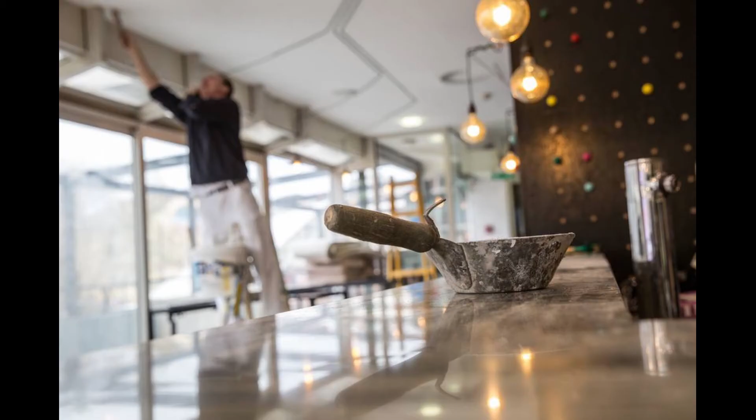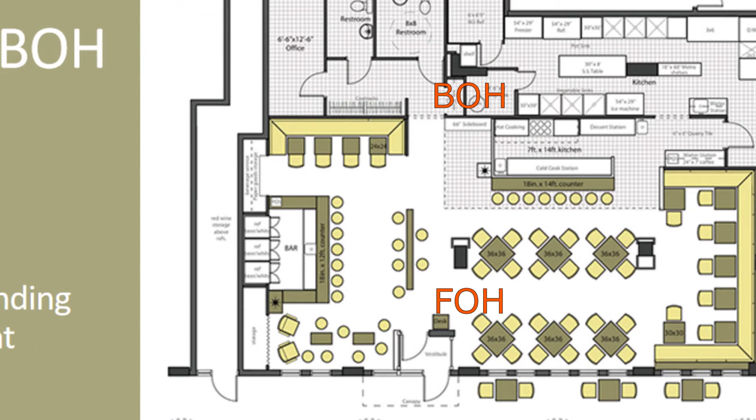Let us first understand a typical layout of a restaurant. All restaurants are divided into two typical zones, FOH and BOH. FOH stands for front of house and BOH stands for back of house. In this typical layout, the color shaded area is the FOH area. FOH is that area which is typically visible and accessible to a customer, such as reception area, different types of seating, cash counter area, even the bar counter, washrooms for the customers, etc.

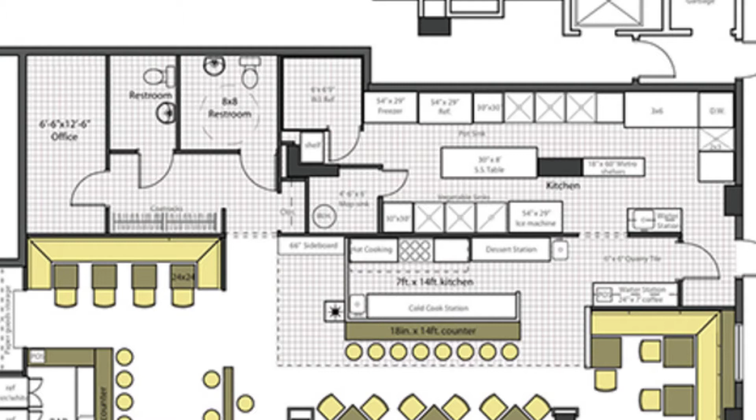BOH is not accessible to a customer and is the heart of a restaurant. It is where all the action takes place. In this typical layout, the grey shaded area is the BOH area. It typically includes the kitchen area, the cold storage area, the manager cabin, the staff change rooms and washrooms.

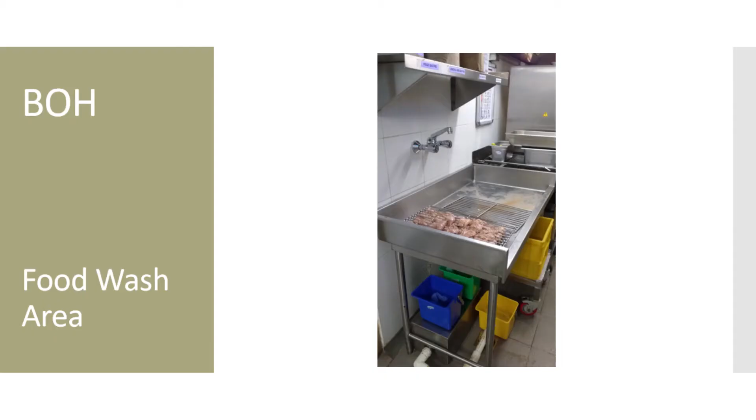The biggest and most complex part of a restaurant is the kitchen, as this is further subdivided into different components, which includes the food wash area, cooking area with options of stove and oven cooking, a clean dish table, sink areas for hand wash and dishes, a dishwasher area, food prep area, walk-in cold storage, etc.

The first step to start with the execution works is to submit the complete drawing set to mall management for approval. If the restaurant is standalone, then this step would not be required, as in that case you would be submitting the drawing set to the Department of Fire and other government bodies for their review and approval.

Once you get approval on the drawings, you are ready to start the site and mobilize your workforce. The next step is installation of temporary lights, power points and water connection, which will be required for your construction work. In an operational mall, you will be required to only work in the night time. So planning your workforce accordingly is important.

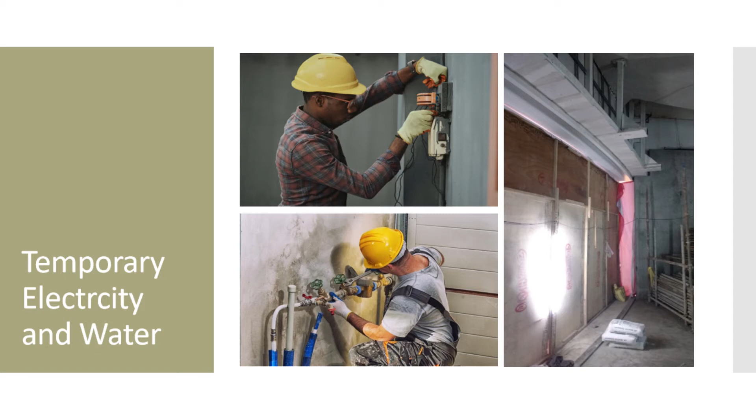Once done with installation of temporary electrical connections and plumbing connections at site, we will start with the site markings. Once done with the site markings, we will start with the framing for the partitions.

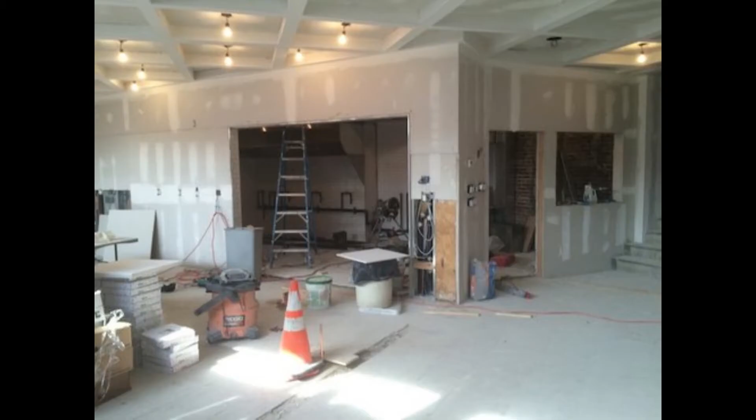Generally, a restaurant doesn't have many partitions. It's mostly the peripheral partitions and the partitions which separate the FOH and the BOH area. Depending on the requirements, you could either do a metal partition with GI studs or do a wooden framing. It totally depends on local material availability, though both kinds of partitions are equally good.

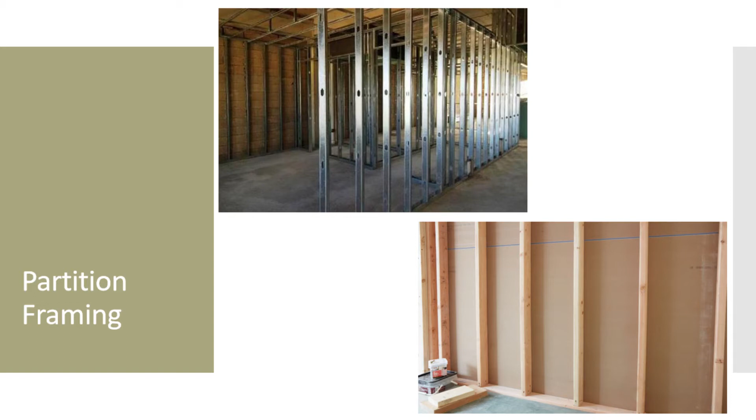From this point, I will divide the video into two major parts. The first part will be about the BOH area and the second part will be about the FOH area. This will help in understanding the concepts better, but please note that works in these areas happen simultaneously and not one after the other. The first thing to be done in the BOH area is marking of the services as per the layout.

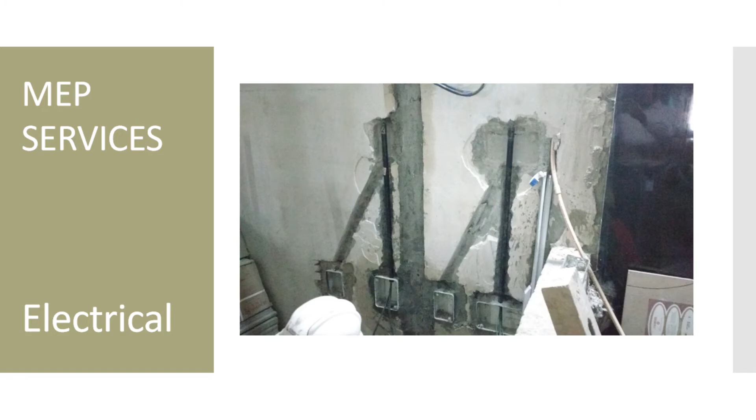The electrical points are marked as per the equipment locations. Wall chasing, if required, is done to run the conduits and install the electrical boxes. Similarly, conduits are installed in the ceiling for lights. This is followed by running wiring and cabling through the conduits, and finally installation of receptacles and lights.

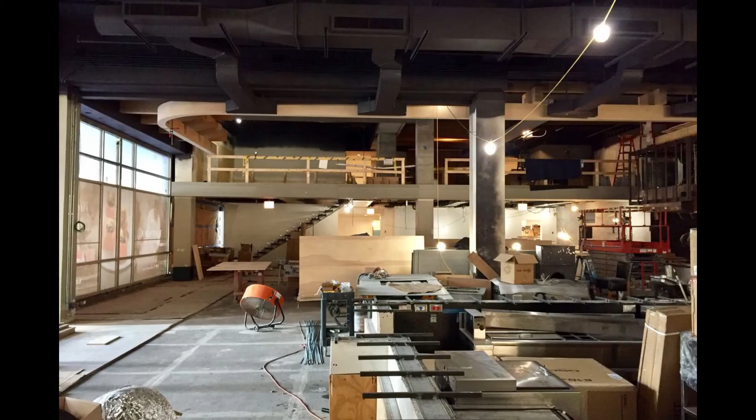The HVAC system is a key part in taking out the exhaust from the kitchen and also keeping the kitchen area cool. The point to keep in mind is the different type of ducts used for kitchen exhaust versus the return and supply duct for the cooling purpose.

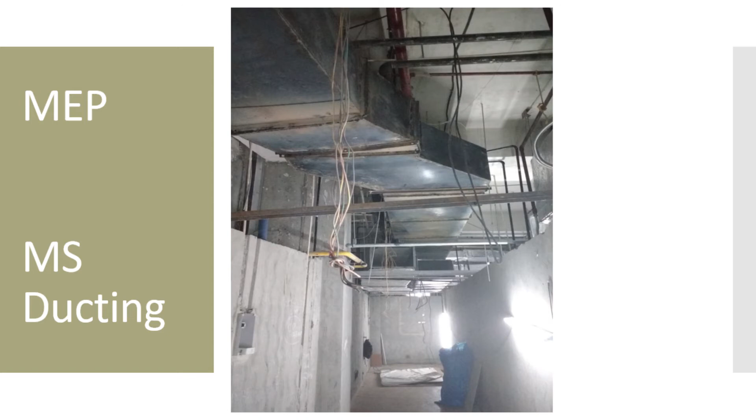MS ducts are used for kitchen exhaust and GI ducts are used as the regular HVAC ducts. The reason behind this is that MS ducts have greater fire resistance than GI ducts. Look-wise, the MS ducting will be greyish, dark greyish in color, while the GI ducting will be silver in color.

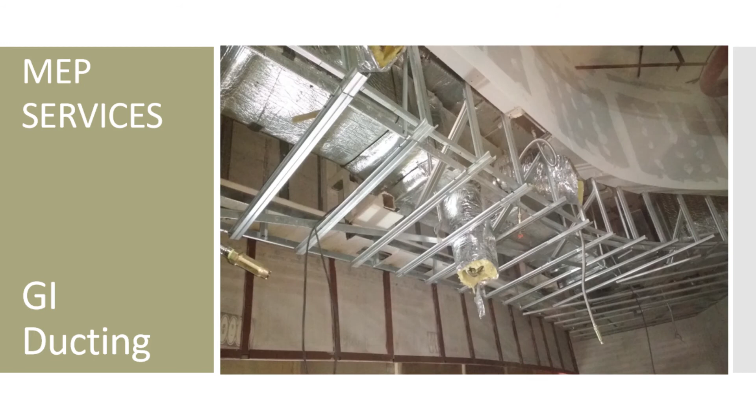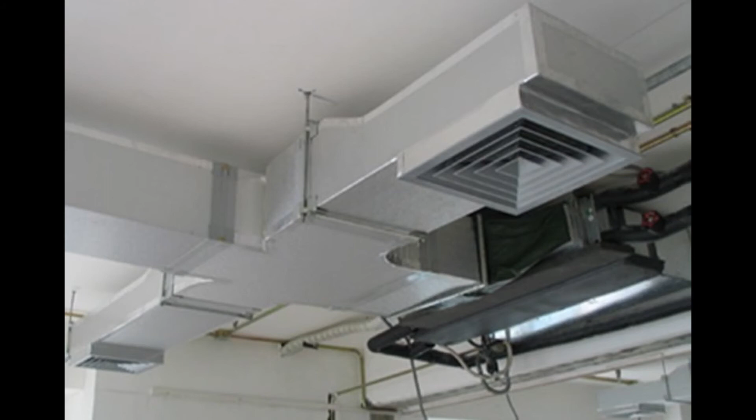HVAC ducting layout is first marked in the ceiling, then accordingly the supports are installed. Post that, ducts are hanged on the supports. Once the ducts are hanged, the different pieces of ducts are connected together and insulation is wrapped over them.

The firefighting system is very critical and consists of different components to prevent the restaurant from catching fire. These elements include the standard sprinkler system, which will work if the fire temperature bursts the glass bulb, and pressured water will be showered to douse the fire.

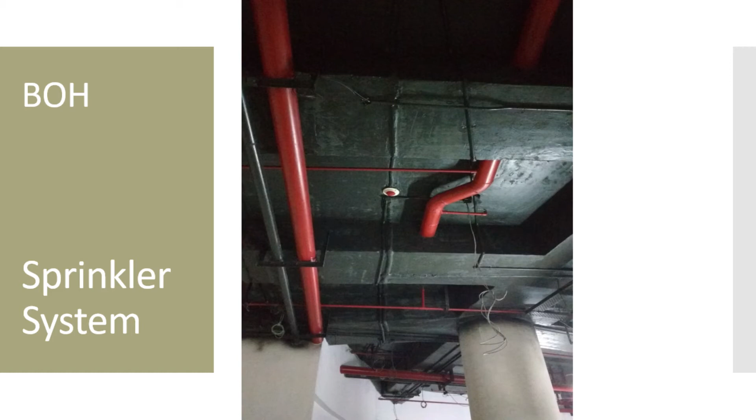The second component is the fire alarm system, which is triggered by heat and smoke. The BOH fire alarm system will be heat based and the FOH fire alarm system will be smoke based. Any heat or smoke triggers an alarm which will tell the occupants to vacate the premises. However, it will not douse the fire.

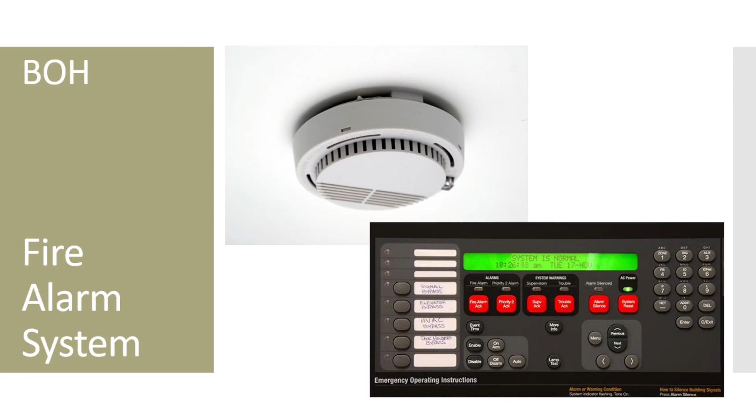The third component is the gas leak detection system. This is required in the cooking area, which triggers an alarm if the system detects any gas leak. This will allow shutting down any gas leak and prevent any mishap.

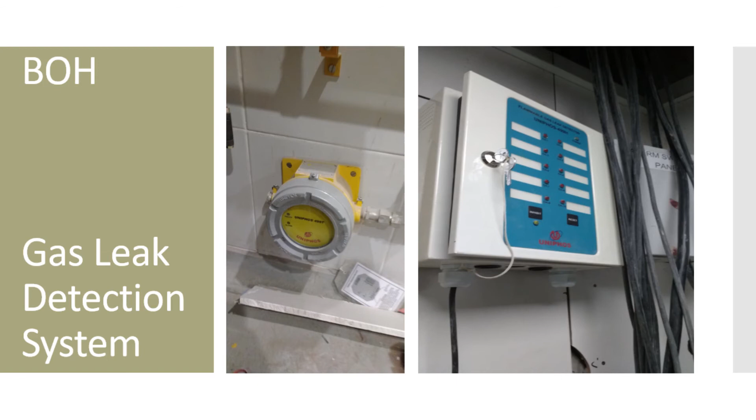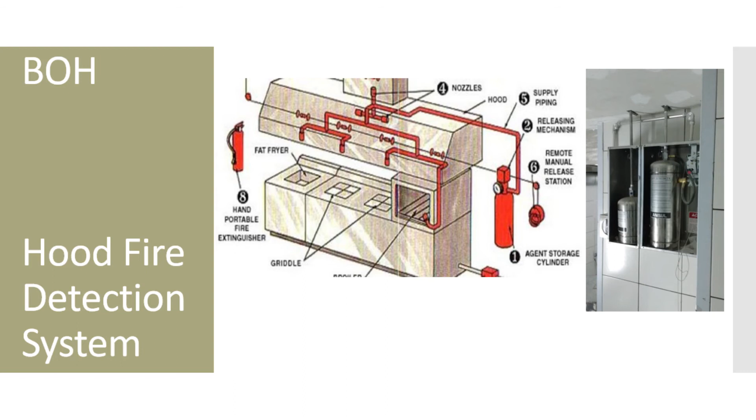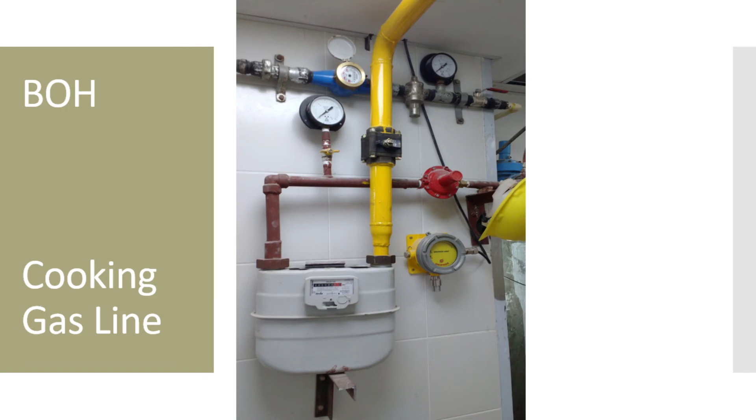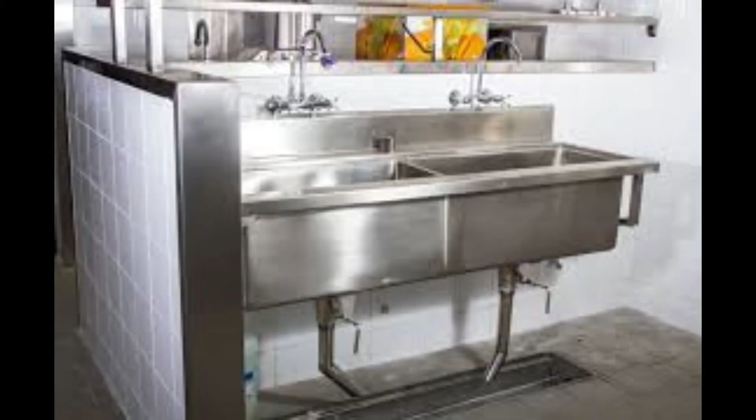The plumbing services are critical as there are several water supply and drain points in our kitchen, including points for hand wash sink, dishwash sink, dishwasher, drinking water supply, and of course the complete plumbing works for the washrooms.

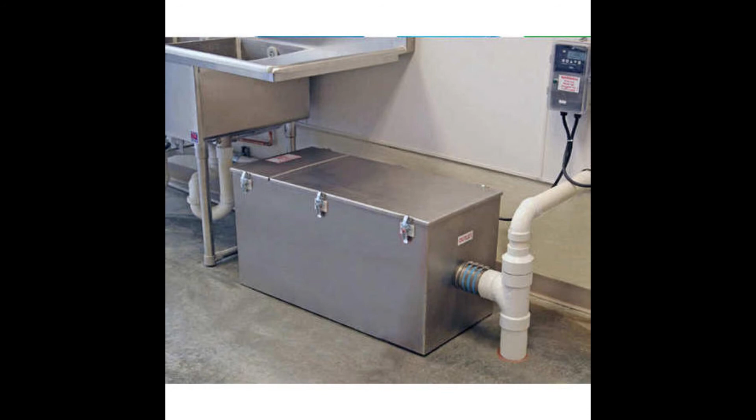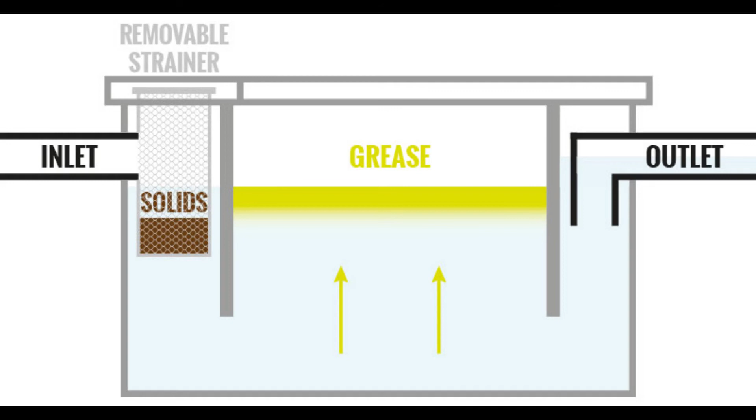An important thing to note is the requirement of a grease trap. The wastewater from the dishwash sinks does not directly go to the drain. Instead, it goes through a grease trap, which basically filters all the grease and prevents the drain line from choking from oil from the food.

Communication services will include having a phone connection and an internet connection, which of course everyone knows are indispensable for restaurant functioning, but are also required by customers.

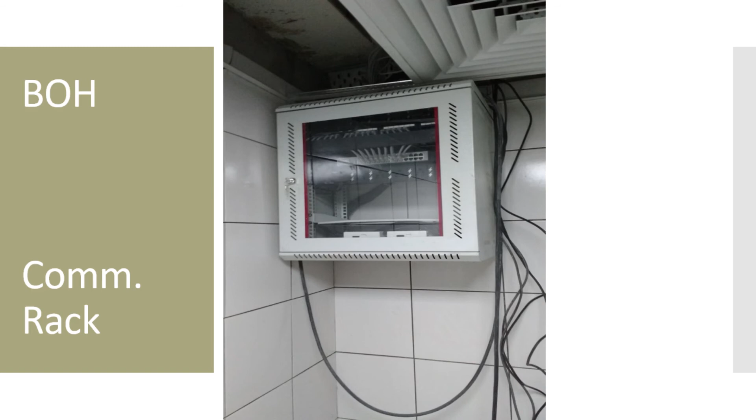A communication rack is installed in a designated space. Generally, this is installed at a secure location like the manager's cabin. This will house switches which will be connected to the server, and all the information such as inventory list, account details, cash flow, day-to-day communications can be securely backed up in the server.

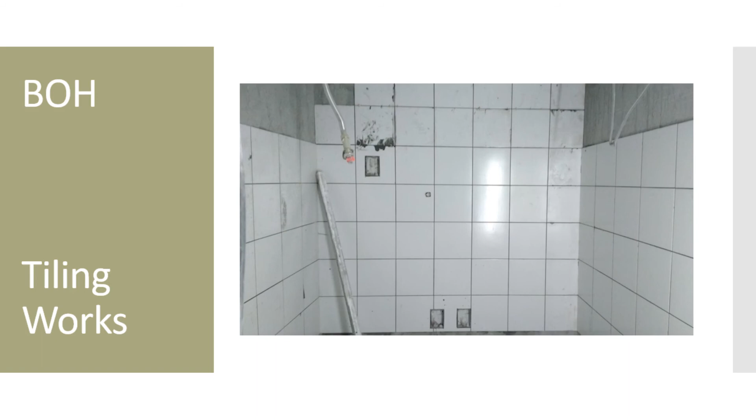The finishing of BOH areas is typically done in white tiles, which are easy to clean and maintain. Similarly, white ceiling tiles are used along with other ceiling services such as lights, diffusers, smoke detectors, etc.

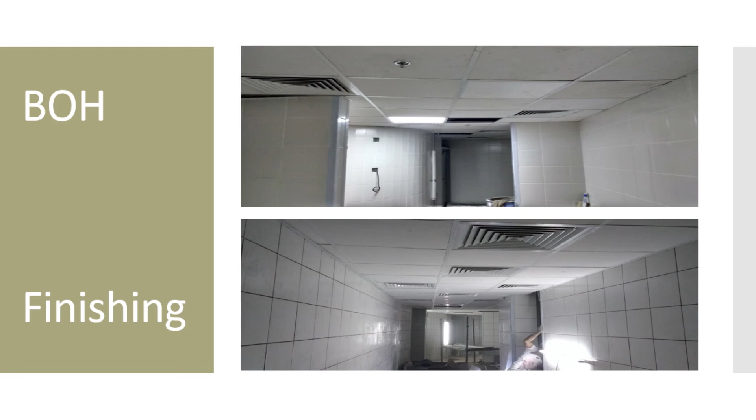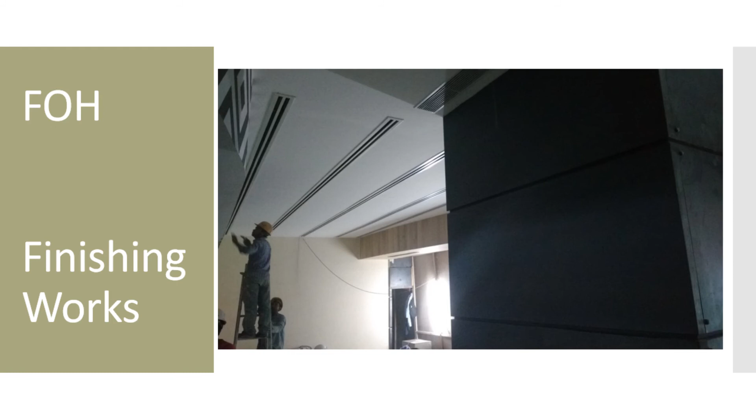Now moving on to the FOH area. The FOH area will have regular MEP services but will have a marked emphasis on aesthetics. Therefore, it's necessary to build the right furniture, take care of all final finishes, and build an ambience which is inviting to the customers.

To start with furniture, if you're buying it, you will have to look at options that suit your design scheme, are good in quality and comfort, and of course within your budget.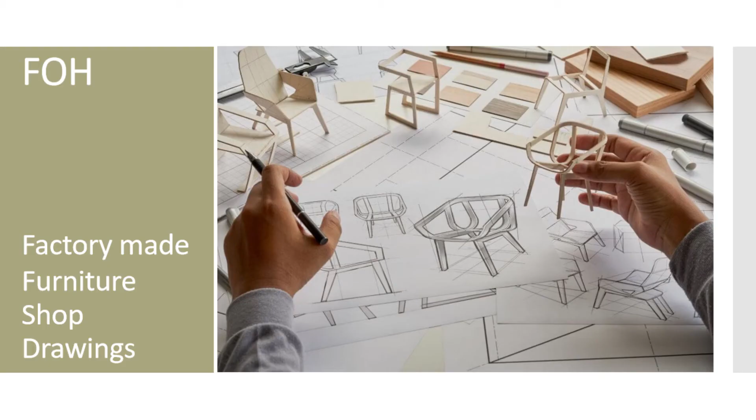If you're getting the furniture built in a factory, there will be several quality checks you will have to get done. Starting from getting the furniture designed, then inspecting the furniture carcasses, the foam quality, the density of the foam, the fabric quality, the stitching, the table bases, the tabletop wood finishes are all very important components to ensure the right final look of your furniture.

There will be several storage units and counters which will be built for your FOH area. The final finishing will be what gives the desired look to your restaurant. Decorative lights also need to be picked up as per the design scheme, which will give your restaurant the formal or the casual look as desired.

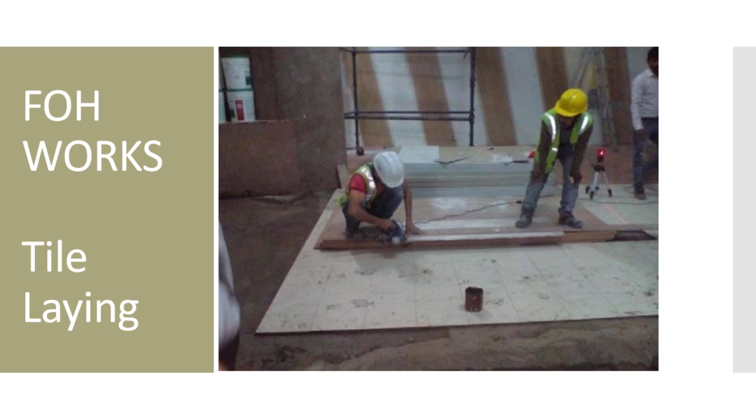The flooring could be chosen from different options like wood, tile, essentially any material which gives the required ambience and is easy to clean, unlike carpet. There are several other design elements like fabric paneling, wood paneling, metal paneling, which will give your restaurant the beautiful look you wanted.

Don't forget to plan for the audio system. The control panel for the audio system should be ideally located either at the manager's desk or at the reception, so it's easy to control the volume of the music or shut it down if required. The wiring and conduiting of the same should be planned earlier, before you commence the finishing works.

I hope this video gives you a basic introduction on the restaurant design execution. I'll create separate videos on each activity related to restaurant execution in my future videos. If you have any questions or comments, please don't forget to write them in the comment section. Thanks for your time.